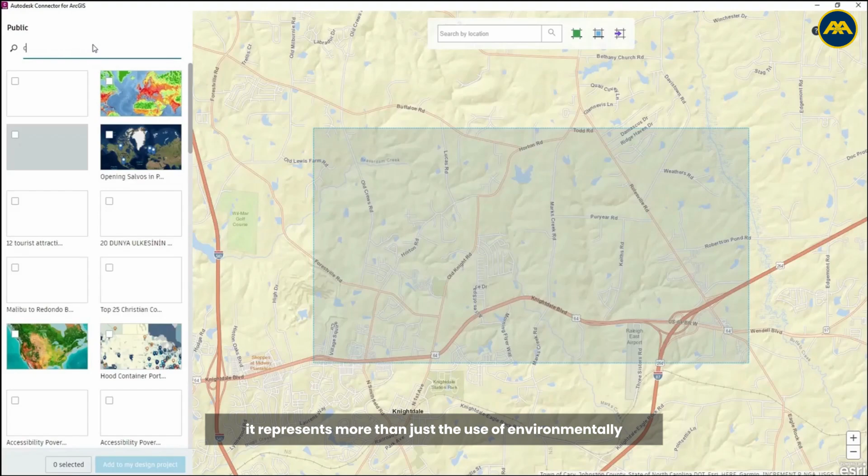Sustainable growth has become one of the most critical challenges and opportunities of our time. In the field of civil engineering, it represents more than just the use of environmentally friendly materials or low-carbon solutions. It is a transformation in mindset, a redefinition of how infrastructure is designed, how resources are managed, and how development aligns with the long-term well-being of both people and the planet.

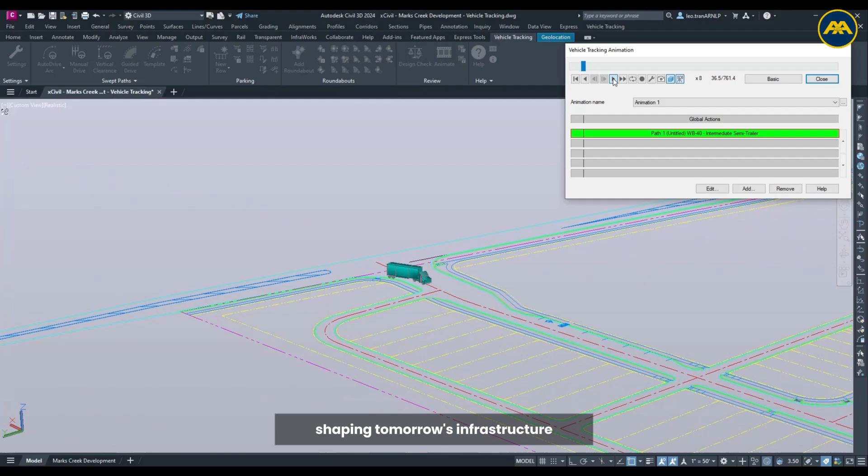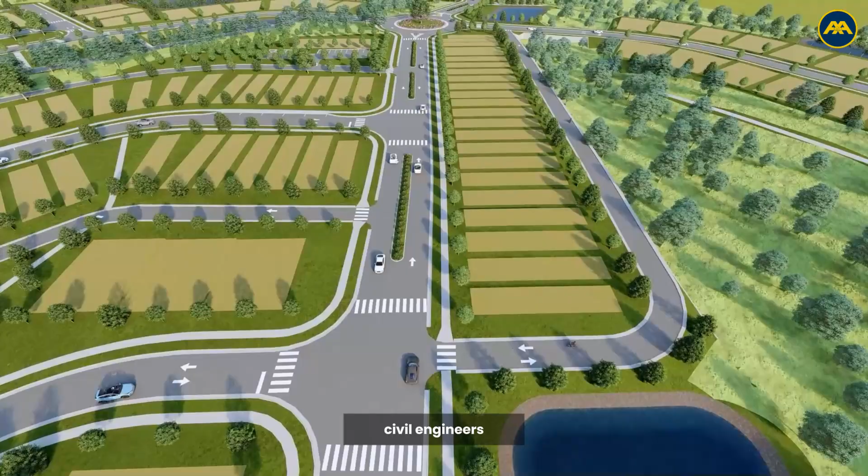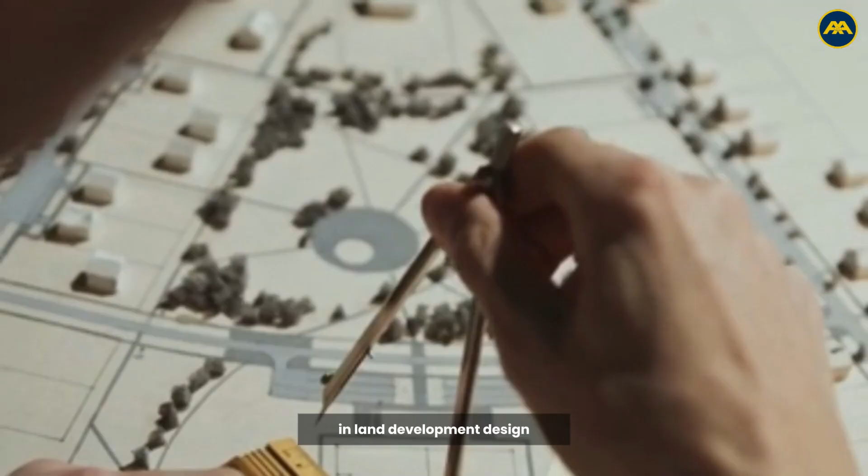Civil engineers play a central role in shaping this transformation. Every city, road, and drainage network reflects the choices engineers make today for the generations that follow. In land development design, engineers are now required to think beyond short-term performance metrics. The question is no longer only about how to complete a project efficiently, but also about how to build systems that remain functional, adaptable, and responsible over decades of use.

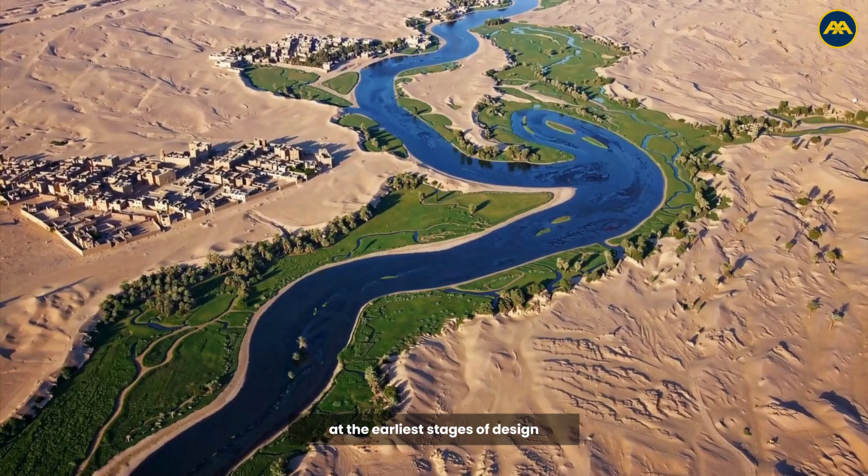The path to sustainable growth begins at the earliest stages of design. Before the first line is drawn, engineers must consider how terrain grading will affect water flow, how stormwater management can prevent flooding, and how materials can be optimized to minimize waste. Each of these design choices carries environmental consequences, and each one offers an opportunity for innovation. Through careful analysis and data-driven planning, civil engineers can create developments that coexist with nature rather than compete against it.

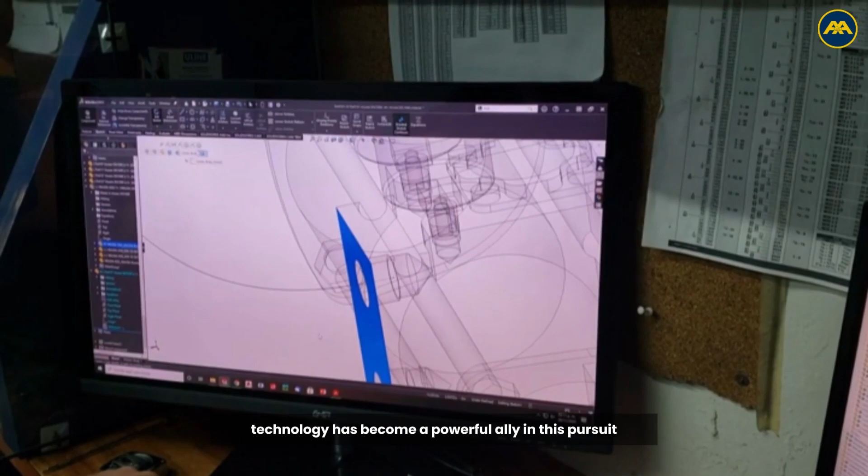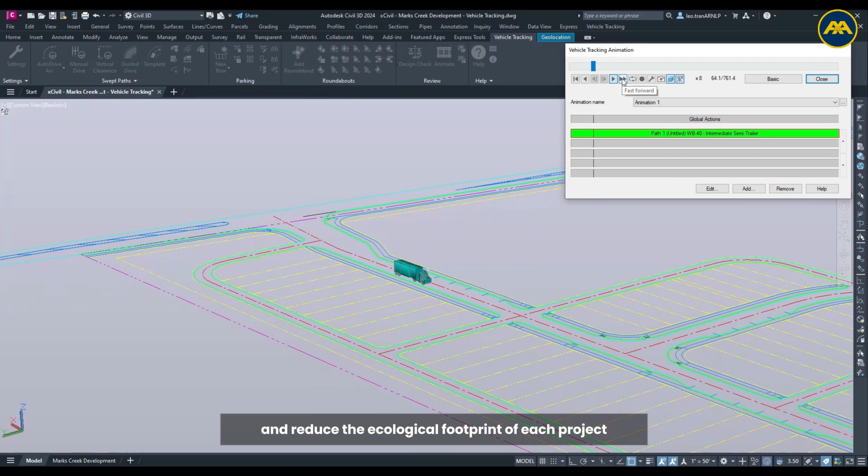Technology has become a powerful ally in this pursuit. With modern tools like Civil 3D and advanced simulation software, engineers can now predict the long-term behavior of terrain, drainage, and road systems before they are built. These digital insights allow teams to identify risks early, test multiple design scenarios, and reduce the ecological footprint of each project. Sustainable engineering is no longer a separate category of work. It is becoming the standard by which all projects will be judged.

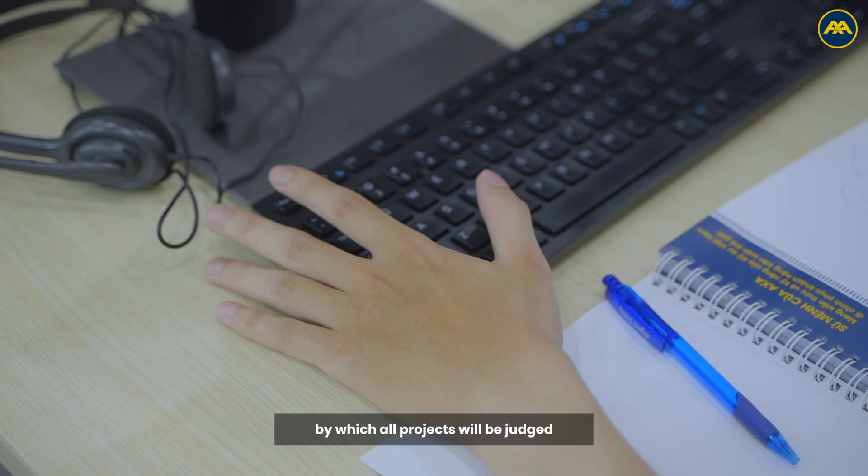Yet sustainability is not achieved through tools alone. It requires a culture of precision, accountability, and collaboration. Civil engineering firms that succeed in this space understand that sustainable design is a continuous process, one that evolves through each project and every partnership. It demands not just technical expertise, but also the ability to coordinate across disciplines, manage resources responsibly, and align with global standards for environmental protection.

As the world faces rapid urbanization, sustainable growth also becomes a question of scale. Cities are expanding faster than ever, and design teams must handle increasingly complex projects within tight timelines. This is where strategic partnerships play a key role. Outsourcing certain phases of design and analysis enables engineering firms to maintain quality and control while increasing flexibility and output. The result is a system that supports sustainable practices both technically and operationally.

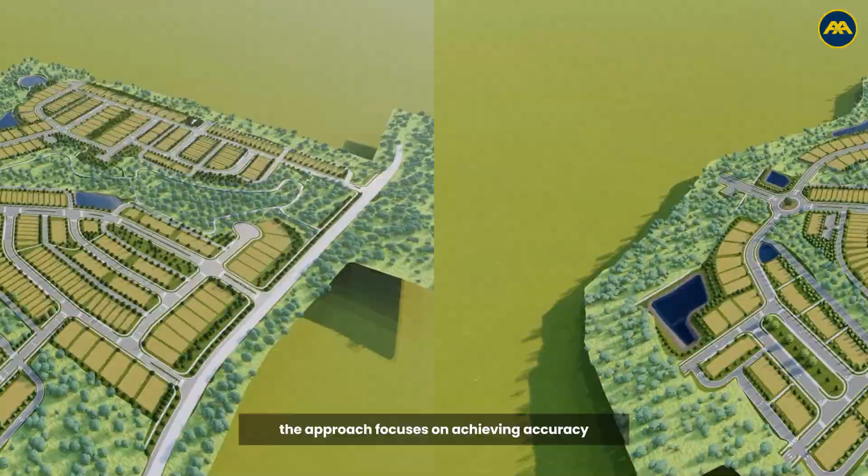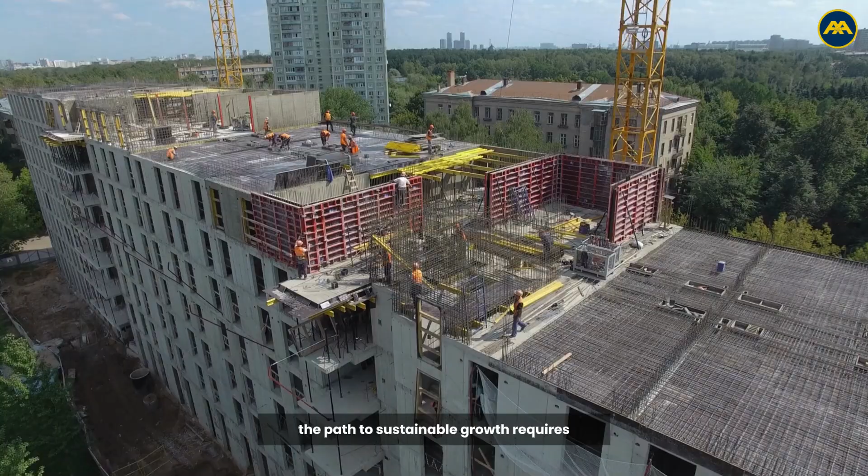Civil engineers hold the responsibility of designing the physical world that future generations will inherit. The path to sustainable growth requires more than innovation. It calls for integrity, foresight, and partnership. By combining thoughtful design, advanced technology, and a global perspective, the profession continues to evolve toward a future where progress and preservation coexist.